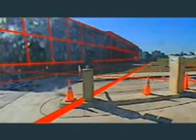It was 37 feet from the top of the tail to the center of the exhaust. From the bottom of the engines to the top of the tail is more than half the height of the Pentagon. Meyssan and many others have tried to figure out where such a large plane could be hiding in this image. The only hiding place is the rectangular post, but the post is not large enough for a 757 to hide behind. Let's zoom in on that upper right corner.

These video images are low quality to begin with, so magnifying them will create grainy images. But despite the graininess, can you see anything that resembles a Boeing 757? We could settle this issue if the military would release all video from all security cameras. So why don't they? Why the secrecy?

Also, notice that the time in the video is incorrect. The military uses IRIG timecode to identify events, so they certainly know precisely when Flight 77 hit the Pentagon. So why provide a false time? The military announced they don't know why the time is incorrect. But is our military really unaware of what is going on at their headquarters? Or are they hiding the time code because it contradicts the official story?

What about the witnesses who saw Flight 77? 'No doubt about it, American Airlines slammed right into the building.' No doubt about it? Who is this guy, and what did he really see? How can anybody be certain about an aircraft flying close by at 400 miles per hour?

How did Flight 77 get to the Pentagon? This is another suspicious aspect of the attack. The plane vanished from air traffic controllers near Ohio, as shown by the question mark. Air traffic controllers immediately called for help. Less than an hour later, an unidentified blip appears on the radar screen near the Pentagon.

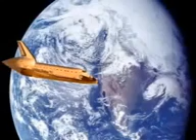The shuttle shattered 40 miles above Texas while traveling perhaps 12,000 miles per hour. Pieces of the shuttle and the astronauts were found over hundreds of square miles. By comparison, the passengers and debris from Flight 77 were confined to a very tiny area.

But where are the pieces? There were only 7 astronauts, but pieces of their bodies were found. There were 64 people on Flight 77, but there is no sign of their bodies or even their blood.

This area is the corridor between rings. There is nothing in this rubble that looks like Flight 77 or pieces of luggage. This hole was supposedly created by Flight 77, but nothing in the rubble would support such a theory. Another photo shows building materials and office furniture, not pieces of airplane. Going inside the offices, the only rubble we find is of that kind.

There are only a few photos that show scraps that appear to be from an airplane. For example, this is supposedly a piece of the skin of Flight 77. However, this metal seems too thin to belong to such a large airplane. These planes are 155 feet long and 60 tons when empty. The engines are 9 feet in diameter, with heavy steel components. The small figure next to the engines is a 6-foot-tall man to show how large these engines are.

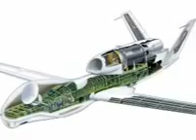Is this a piece of Flight 77? It would be helpful if the military would release high-quality photos of these pieces so that we could see them clearly. So why doesn't the military provide better photos? Perhaps because a high-quality photo of this item would show us that it's so small and delicate that it looks like it belongs to a Global Hawk.

Here is another thin piece of metal that would fit better on a Global Hawk than a 757. Furthermore, a 757 would leave a total of 60 tons of scrap, not just a few pieces that were so thin that people could pick them up without effort.

These tiny scraps of aircraft would make sense if a Global Hawk crashed into the Pentagon, because the Global Hawk was designed to be extremely lightweight. One reason for its low weight is to allow it to remain in the air for a very long time, so it can observe people on the ground for long periods.

It can remain in the air for as long as 35 hours. Another reason for its low weight is to reduce the power requirements of the engine, which in turn reduces the noise and heat from the engine. This makes it difficult for people to hear it, or pick it up with infrared sensors. A Global Hawk is like an eggshell with an engine.

Christopher Bollyn of the American Free Press spoke with Steve Riskus, who saw the plane hit the Pentagon and took these photos of the fire before the firemen arrived. Steve said the plane flew by his windshield, but he did not hear much noise.

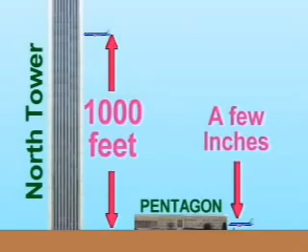This photo resembles those from other disasters. Specifically, most of the people are dressed to deal with fire, or they have gloves and work boots. There are no secretaries in high-heeled shoes, nor are there any children. However, a few photos show executives wandering around among the firemen.

Who are these two guys? Why are they picking up scraps? They do not have gloves on, nor work boots. They are holding the parts away from their body, which is a sign that they are worried about getting their clothes dirty. So why are they walking around in the firefighting foam, water, human body parts, and sharp scraps of airplane? Why are they so concerned about finding scraps of Flight 77 that they will rush out among the firemen to help them pick up a few scraps?

The police are supposed to arrest people who pick up evidence. For example, on February 4th, 2003, 2 people were arrested for picking up space shuttle debris. They faced 10 years in prison and an incredible fine. Why didn't the police arrest these guys?

Are these the FBI investigators? If so, why didn't they let the workers with gloves and boots pick the scraps up? A Boeing 757 would leave 60 tons of scrap, in which case these 2 guys would not be able to contribute anything significant to the cleanup.

But if a Global Hawk crashed into the Pentagon, there would be only 4 tons of scrap. Furthermore, since more than 50% of a Global Hawk is carbon fiber and resin rather than aluminum, if most of the non-metallic material burned, there would be less than 2 tons of scrap. This would explain the mystery of why there are so few scraps.

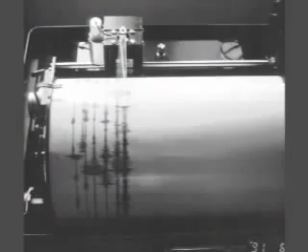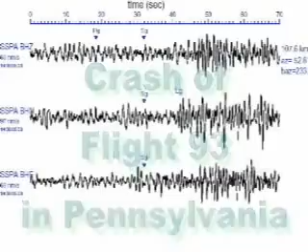However, there is no seismic data for the airplane crashing into the Pentagon. The scientists who analyzed the data reported, "Despite detailed analysis of the data, we could not find a clear seismic signal. A seismic station near the Pentagon does not show any clear sign of an airplane crash. A different station shows a blip that might be an airplane crash at 9:39, and a third station shows nothing."

The blip in the middle graph, which I colored red to make more visible, appears to be a possible airplane crash, but the scientists who analyzed the data claim that it occurred at too high a frequency. The question this leads us to is, would the frequency be too high for the explosion of a missile?

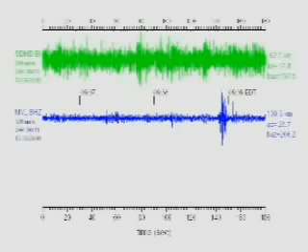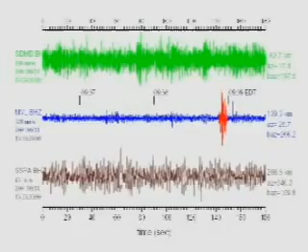6 Global Hawks were built as of December 2002, so if one of them crashed into the Pentagon, there should be one less in the inventory. Christopher Bollyn spoke with the Air Force in December 2002, and they admitted that 2 Global Hawks were lost in ongoing operations. Not surprisingly, the Air Force refused to explain what "in ongoing operations" means.

As previously mentioned, Flight 77 vanished from air traffic controllers near Ohio. Nearly an hour later, it was noticed on radar near Washington, D.C. It was dropping from a high altitude. CBS News describes it as a downward spiral, turning almost a complete circle.

How do we explain the sudden appearance of Flight 77? Perhaps because it was actually one of the missing Global Hawks, not Flight 77. If a Global Hawk flew from Ohio to the Pentagon above 60,000 feet, it would not be easy to see on radar until it descended to below 10,000 feet.

Flight 77 dropped to treetop level and headed towards the Pentagon. But where are the witnesses who heard the tremendous roar of its jet engines? The lack of noise suggests that Flight 77 was actually one of the missing Global Hawks, which are very quiet.

As the Global Hawk crossed into Pentagon property, a missile may have been fired at it. Perhaps the Pentagon has missiles in its security system. The missile would have shattered the Global Hawk and incinerated most of its carbon fiber.

But just in case small pieces survived, people would have to check for scraps. The fuselage has an aluminum frame, so if a large piece of it survived, it would have to be quickly hidden also. While a Global Hawk and a missile can explain what happened at the Pentagon, where are the passengers and crew of Flight 77?

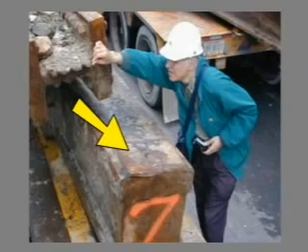At the upper left corner is a standard I-shaped beam. It would be considered massive in most buildings, but it seems delicate next to the biggest beams of Building 7. As is typical in the design of buildings, bridges, and most industrial products, Building 7 was designed with more strength than it actually needed. So how did a building with such massive steel framework disintegrate into such a tiny pile of rubble from a few tiny fires?

A government agency, FEMA, conducted an investigation into why the buildings in the World Trade Center collapsed. However, the editor of Fire Engineering magazine became so disgusted by the investigation that the January 2002 issue carried an angry article in which he accused the investigation of being a half-baked farce.

Later that month, both Bush and Cheney asked Tom Daschle to limit the investigation. Apparently, a half-baked farce was more of an investigation than Bush and Cheney wanted. I suppose they would have preferred a quarter-baked farce.

In March 2002, the Committee on Science of the House of Representatives held a meeting to investigate the investigation. There were more insults and accusations at this meeting. For example, Congressman Boehlert complained that the investigation seems shrouded in excessive secrecy. Professor Corbett complained that they were trying to run an investigation with part-time engineers and scientists and on a shoestring budget. There were also accusations that landlords and insurance companies interfered with the investigation. It seems that a lot of people were helping President Bush ruin the investigation.

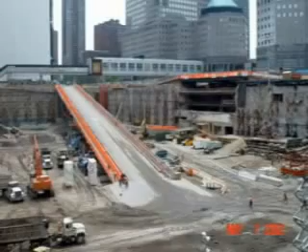Ken Starr spent $40 million investigating the sexual activities of President Clinton. Why didn't Ken Starr advocate giving money to the investigators of the World Trade Center collapse so that they didn't have to depend on part-time scientists and on a shoestring budget?

In May 2002, FEMA released the report on the collapse of the buildings. Not surprisingly, the report doesn't explain anything. For example, rather than explain how the fires caused Building 7 to collapse, the FEMA report has this: 'The specifics of the fires in Building 7 and how they caused the building to collapse remain unknown at this time.' Our government spent 7 months investigating the collapse of the World Trade Center buildings, and at the end they announce they have no idea what happened to Building 7. If FEMA was a private company, I would demand my money back. Since they are a government agency, their worthless report is evidence that they are involved in covering up a scam.

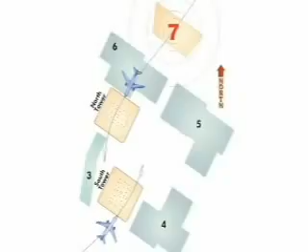The government's explanation for how the towers collapsed is often referred to as the pancake theory. The report created by FEMA has only 2 diagrams to explain this theory. The first diagram shows a fire, and the next diagram shows a floor falling down onto the floor below it. Supposedly, the falling floor breaks the joints holding the floor beneath it, and then both of those floors fall to the floor below that, which breaks that floor, and so on, eventually creating a stack of floors at the base of the building.

One problem with this theory is that photographs of the South Tower show the top section broke off and fell to the ground, landing on top of building number 4. The pancake theory definitely does not explain the South Tower. However, just as FEMA did not bother to explain what happened to Building 7, FEMA did not bother to explain what happened to the South Tower.

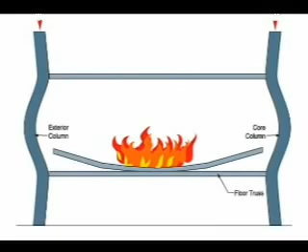The towers did not simply fall down or break into pieces. Rather, as jets of dust flew out the windows at extreme velocity, that portion of the building disintegrated.

Dust was thrown hundreds of feet. When it was over, it was difficult to find anything resembling office furniture, chunks of concrete, human bodies, or large pieces of the steel frame.

The towers had steel frames. They were not steel-reinforced concrete structures. The concrete was used only as a flooring material. Somehow, virtually all of the beams broke apart into short sections.

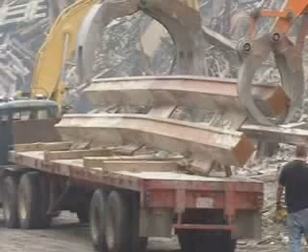A closer view of the rubble makes it look as if the towers were put through a giant shredding machine. What happened to all of the office furniture? Where are the elevators? What about the staircases? The concrete, office furniture, and people disintegrated into such tiny pieces that firemen were scooping them up with buckets.

How can buildings made of massive steel beams and thick steel plates shred themselves into pieces? This is as ridiculous as an automobile crashing into a wall and then shredding itself into pieces. Buildings and cars are made of low-carbon steel, and this type of steel simply does not behave in this manner. This type of steel bends, it does not shatter into pieces. There should be large, twisted pieces of steel assemblies in this rubble.

Perhaps you wonder if the beams in the World Trade Center were thin and delicate, and that the fire destroyed the towers because the architects did not make the beams strong enough. However, architects always give a building more strength than it needs in order to provide a margin of safety. The towers withstood storms for decades, and there was never any sign that reinforcements were needed.

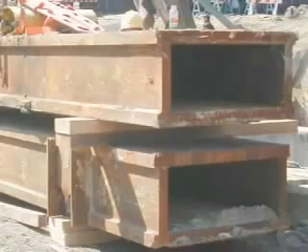This photo shows both a rectangular core column and some square exterior columns. There were 236 of these square columns running up the exterior of each tower.

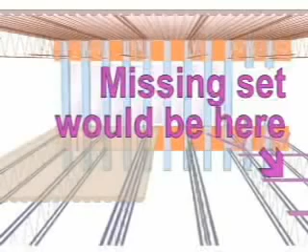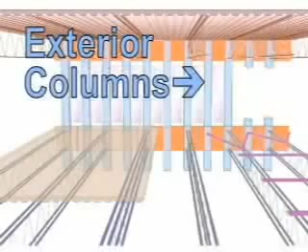The exterior columns were further strengthened with steel plates. The plates were welded to the columns and then bolted to one another, forming straps around the tower. Since the floors were spaced 12 feet apart, the set of trusses was repeated every 12 feet, and the steel straps that wrapped around the tower were also repeated every 12 feet. As you can imagine, that put a lot of steel in this building.

The empty space in the trusses was used for ceiling tiles, electric lights, air conditioning ducts, and other utilities. It is important to realize that the framework of these towers was 100% steel. By comparison, the building in Oklahoma City that Tim McVeigh was accused of destroying had a concrete framework with steel reinforcing rods in the concrete.

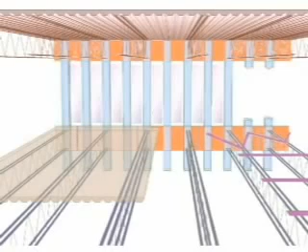This is a highly simplified cross-section of the tower. It shows one floor of the tower, looking down onto the concrete floor. There were 47 rectangular columns in the center of the tower, although only 4 are shown in this simple diagram. There were 236 exterior columns, although only 16 are shown.

These exterior columns were literally on the outside of the building. Many people assume that these towers disintegrated because they were weak, but there is no evidence for such an accusation. Rather, the photos and descriptions from people inside the towers prove that these towers were so incredibly strong that when the airplanes crashed into them, each tower merely swayed a bit in the opposite direction and then swayed back to their normal position.

Both towers then remained motionless. People inside the towers felt them tilt, but the movement was so small that neither photos nor video show the tilting. Winter storms caused the towers to shake more than those airplane crashes. How could the towers absorb 80-ton airplanes crashing into them at 400 miles per hour without wobbling enough for us to observe it? Obviously, these towers were incredibly strong.

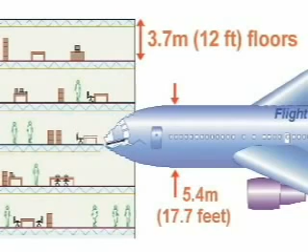According to engineering sites that have technical data for these towers, the wind force that these towers had to withstand was greater than the force of those airplanes. In other words, a strong wind put more stress on the towers than those airplanes. So what caused these strong buildings to shatter into pieces?

The official explanation is that a fire did it. Since no fire has ever destroyed a steel structure before, how could fire destroy buildings strong enough to handle the crash of an 80-ton airplane? The only difference between the fires in the towers and conventional office fires is that thousands of gallons of jet fuel had splattered inside the towers. Is jet fuel capable of creating some type of monster fire that destroys steel buildings?

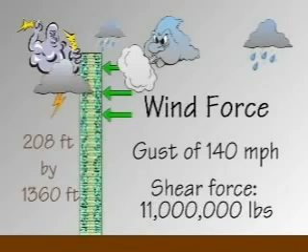The Boeing 767 that hit this tower was a large airplane with about 80 tons of metal, people, and luggage. The plane slammed into the tower at perhaps 400 miles per hour. Pieces of the aircraft, flooring, and office furnishings would have flown through 2 or 3 floors. Anybody in the path of this flying debris would have been killed. The thousands of gallons of jet fuel that sprayed into this area and then caught on fire would certainly kill a lot of people also.

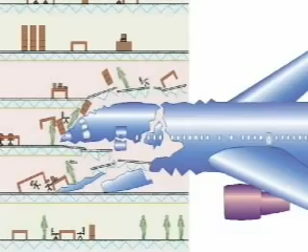The only way anybody could survive this airplane crash was if the flying debris and the fires did not reach them. Since at least one man and woman survived, and since they were on different floors, they proved that the fires and airplane debris did not extend throughout the entire area of the crash zone. Furthermore, these people walked to the hole from wherever they were at the time of the crash. How could this woman walk through burning jet fuel? How could she survive fires that were so intense that they were capable of destroying a steel structure?

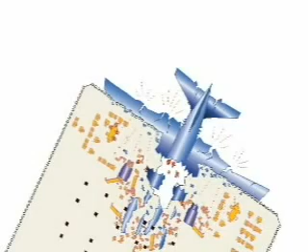As I explain in more detail in the book, there is no evidence that the fires in these towers were extreme. In fact, the fire in the Meridian Plaza office building in Philadelphia in 1991 was much worse, and that building did not even break into 2 pieces.

The fire in the South Tower was so small that it did not even spread from one side of the floor to the other. The people who jumped out the windows created the illusion that the fire was so intense that they would rather jump than be burned by the fire.

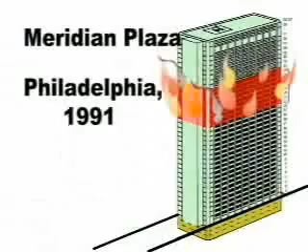Even if the fires were intense, fire does not shatter steel structures. Look at the steel grate in a fireplace. The grate is in contact with hot coals for hours, and sometimes natural gas flames burn underneath at the same time. However, the grates never shatter into pieces.

Rather, the heat merely causes the iron to oxidize faster than normal. After many years, the grate develops a multicolored crust of oxide, with particles of ash and soot in the crevices. Pieces of the grate eventually fall off, but only because of the thinning of the metal due to oxidation. No fire has ever caused a fireplace grate, steel building, steel automobile, or any other steel structure to disintegrate.

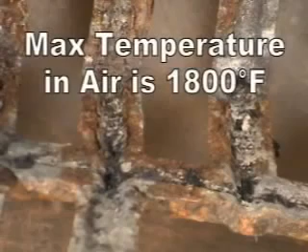The maximum temperature hydrocarbons can reach in the atmosphere is about 1800 degrees Fahrenheit. However, that maximum temperature can be reached only when the hydrocarbons and the air are mixed in perfect proportions. These perfect proportions are reached only in a few controlled situations, such as a kitchen stove. This produces flames that are clean and a beautiful blue, rather than yellow and leaving trails of soot. Even though stoves reach the maximum possible temperature, they never shatter into pieces. So how could even lower temperatures cause the towers to disintegrate?

Controlled Demolition is a company that demolishes old buildings. They demolished the building in Oklahoma City that Tim McVeigh was accused of blowing up. They were also hired to clean up the mess at the World Trade Center. They developed a special explosive and technique of using it for demolishing steel structures. They are so proud of this technology that they trademarked its abbreviation,

DREXS. Their British division describes the technology as, 'Our DREXS systems segment steel components into pieces matching the lifting capacity of the available equipment.' In other words, if your trucks can hold pieces of steel up to 24 feet in length, then this company will cause all steel assemblies to break into sections 24 feet or less.

If a fire can do exactly what controlled demolition does with their special trademarked explosives, then I'd like to start a new business called Fire Demolition Incorporated. This company will demolish buildings by setting a few small fires on a few floors. These fires will demolish the building just as thoroughly, but at a much lower cost. I need money to get this business established. Are any of you interested in investing?

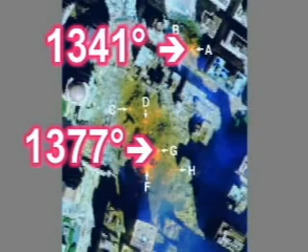These incredible temperatures are more evidence that explosives were used. The explosives in the basements had to be powerful to break apart the massive steel beams. Explosives create very high temperatures, and the heat had nowhere to go since it was deep underground.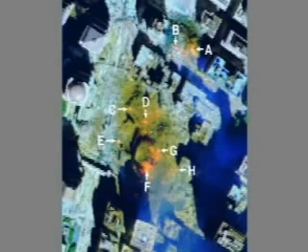According to the scientists who analyzed the seismic data, the North Tower collapsed in about 8 seconds. The collapse started at about the 94th floor, near this woman. This means that 94 floors shattered at an average rate of about 10 floors per second.

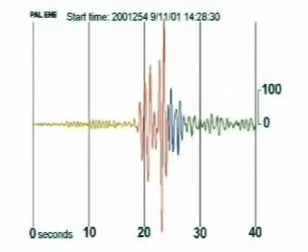If this woman had tossed a steel beam off the edge, it would have hit the ground about 8 seconds later. The formula to figure this out is very simple, if we ignore air resistance. 94 floors at 12 feet per floor is 1,128 feet. Divide that by 16 and take the square root, and we get 8.4 seconds.

This means that the North Tower collapsed as fast as objects fall when there is no air resistance. As I explained in my book, explosives were shattering the towers slightly faster than the rubble was falling.

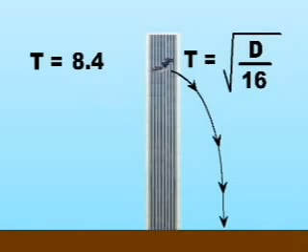The towers were built by the government, so taxpayers owned both of them. However, somehow the government was convinced to lease the towers for 99 years. Larry Silverstein became landlord on July 24th, less than 2 months before the attack. He then had control of the maintenance and security departments, and he began to replace security personnel.

Silverstein brought Frank Lowy into the deal to become landlord of the underground shopping mall. Lowy is a billionaire who owns shopping malls in several nations. After the towers disintegrated, Silverstein demanded insurance companies pay him twice what the policy stated on the grounds that each tower was a separate attack. What a coincidence that after these guys got control of the World Trade Center, Osama decided to destroy the entire complex.

Or is this Israeli journalist correct that a few Israelis were involved in the attack? He believes that the wedding hall that collapsed mysteriously in Jerusalem was their test of demolishing a building while people were in it. And is he correct that the mysterious crash of Egypt's Flight 990 was a test of getting control of an airplane? A newspaper in New Hampshire mentioned the amazing coincidence that the air traffic controller watching over Flight 990 also watched over the 2 planes that hit the towers.

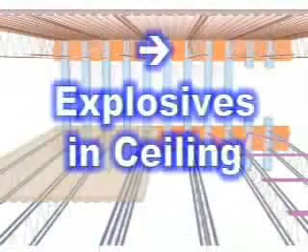A researcher of the Kennedy assassination points out that most people believe in coincidence theories because they explain everything as being due to coincidence. For example, most people believe it was coincidence that all 4 airplanes were 50 to 80% empty. That Todd Beamer decided to spend his last 13 minutes of life talking on a lousy quality airplane phone to a stranger rather than his pregnant wife. That fire pulverized 3 steel buildings even though fire never did such a thing before or after. That terrorists hit the empty section of the Pentagon.

How do coincidence theories make more sense than conspiracy theories?

Some people consider my book to adequately explain that the September 11th attack was a scam. However, some people who know me personally responded by giving me clippings of newspaper and magazine articles to show me that Flight 77 really did hit the Pentagon, and that Osama did not have any assistance from the U.S. government. I have also been told that the Discovery Channel thoroughly explains that fire caused the towers to collapse.

Most people are certain that the true source of knowledge comes from large corporations, not individuals such as myself. Therefore, I would like to show evidence that some news reports are attempts to manipulate us, not educate us.

For example, James Robbins claims to have seen Flight 77 crash into the Pentagon. When Robbins heard of Meyssan's accusation that Flight 77 never hit the Pentagon, Robbins wrote an insulting article for the National Review in which he claims Lenin, Hitler, and Pol Pot were just like Meyssan.

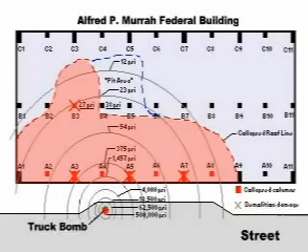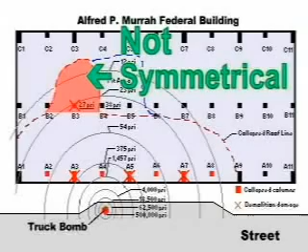The only sensible explanation is that explosives had been placed on the column that supported this section of the building, and when those explosives were detonated, the column was shattered and this section collapsed. Partin's conclusion is that demolition explosives were placed in the building, and McVeigh's truck bomb was merely to fool people into believing that McVeigh was responsible. Unless somebody can show that General Partin's calculations are wrong, the Oklahoma City bombing was a scam.

Unfortunately, many people dismiss Partin on the grounds that if he was correct, the government wouldn't allow him to expose the scam. Now consider that unless somebody can show that Meyssan, I, and others are wrong, the September 11th attack was a sequel to the Oklahoma City bombing.

The attacks were identical. For example, in Oklahoma, Tim McVeigh was the foolish patsy, a truck bomb grabbed the attention of the public, and demolition explosives that had been placed in the building before the attack were detonated while people were inside. On September 11th, Mohammed Atta was the foolish patsy, airplane crashes grabbed the attention of the public, and demolition explosives that had been placed in the buildings before the attack were detonated while people were inside.

Furthermore, some of the same people and companies were used for the investigation and cleanup of both attacks, such as Gene Corley and Controlled Demolition Incorporated.

Whoever did the Oklahoma City bombing scam got away with it. This undoubtedly gave them confidence to expand to something bigger. And since they got away with the September 11th attack, they may be planning something even more spectacular.

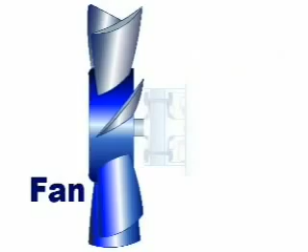A turbofan is similar to an electric fan, except that the fan is driven by a gas turbine engine instead of an electric motor. A small amount of air from the fan is used by the turbine, but most of it flows around the turbine. Fuel is sprayed in a combustion chamber, and the hot, high-pressure gas rotates the turbine as it shoots out the rear. This is the rear of a turbofan.

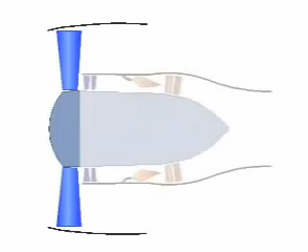The cool air flows around the engine. The turbine exhaust flows from the smaller, tapered section. Most of the exhaust is pure, cool air. Only a small amount of air passes through the combustion chamber, so only the center of the exhaust could have a different visual appearance from the outside air. The most likely color of the exhaust is a light brown, due to soot and pollutants.

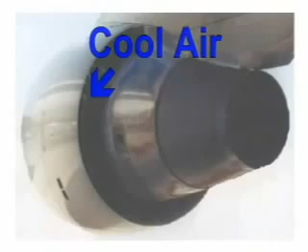Even if you look directly into the rear of the engines, you cannot see any white exhaust. During takeoff, the engines are burning a lot of fuel, but even then, the exhaust of a properly maintained turbofan is difficult to see.

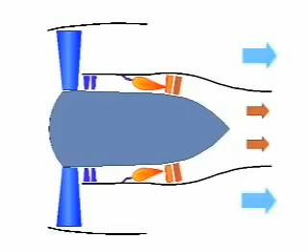Rocket exhaust is so hot it glows white as it leaves the engine. It cools into white clouds, sometimes with a brownish tint. What are these white clouds made of? And why do rockets produce these white clouds, but not airplanes?

The exhaust is white because a third of it is steam. This extreme concentration of steam rapidly condenses into tiny droplets of hot water, which appear to our eyes as white clouds. You can see this effect with a tea kettle. The white plume that comes from a tea kettle is steam.

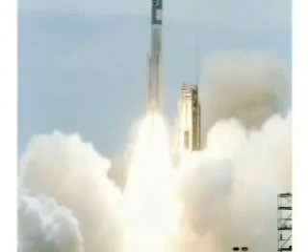Forest fires also produce extremely visible smoke. This is partly due to steam, but these fires also create a lot of ash and partially burned hydrocarbons. The ash consists of small particles of non-flammable materials. Volcanoes also produce extremely visible smoke, mainly because of steam and ash. However, in this case, the ash is powdered rock.

Why do missiles produce so much steam? Because they carry their own oxygen rather than use the air. The air is mostly nitrogen, and the nitrogen dilutes the steam. By not having atmospheric nitrogen, the exhaust has a much higher concentration of steam.

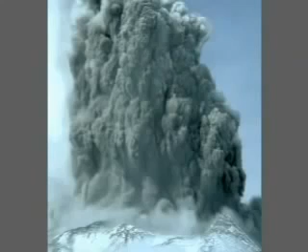A turbofan produces steam, just like missiles. So why doesn't the exhaust from a turbofan appear white? Because the nitrogen from the air dilutes the steam so much that droplets don't form.

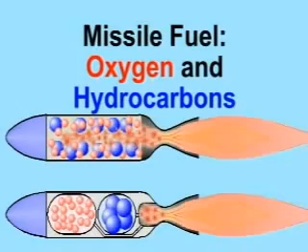Actually, under certain conditions, the exhaust of a turbofan is white. At high elevations, the air is below freezing, and it's often saturated with water vapor. Any additional water vapor will form ice crystals. This causes the engines to leave trails of ice crystals.

Since these trails form only under special conditions, a plane flying at a slightly different elevation or location may not leave a trail. However, turbofans don't leave trails on warm days, such as that morning of September 11th. Only missiles have enough steam in their exhaust to leave a trail of water droplets at ground level and in hot weather. So, how could this trail be from Flight 77?

The white trail in the Pentagon security video is certainly the exhaust of a missile, not a passenger airplane. Only conspiracy nuts and people who do not know much about turbofans would insist that Flight 77 created that white trail.

The only sensible issue to debate is who fired the missile. The CIA? The U.S. military? And was the missile fired from a drone, such as a Global Hawk? Or was it fired from a truck on the Pentagon property? Or was it a shoulder-mounted missile?

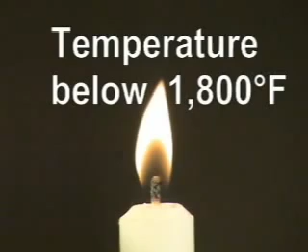When an airplane crashes, some of the fuel splatters into the air and quickly vaporizes, creating an explosive mixture of fuel and air. When this mixture ignites, the flame rapidly travels through it, creating a blast that resembles a low-power explosive. However, the oxygen in this mixture is quickly consumed, so this initial blast is very brief.

Once the oxygen is gone, the fireball resembles a candle flame because the fuel is burning only along the outside. As with candle flames, the fireball changes its shape and rises upward, but it does not expand. The size of the fireball is determined by the distance the fuel splattered and the initial blast.

The fireball at the South Tower was enormous because a lot of fuel splattered into a large area. However, once it formed, it did not expand by much. Rather, it rose upward while being pushed southeast by the breeze. Also, it was orange and full of soot.

Candle flames are normally clean by comparison because they are small and indoors, so nothing interferes with the mixing of oxygen and fuel. However, large candle flames can produce enough heat to create their own turbulence, thereby causing soot.

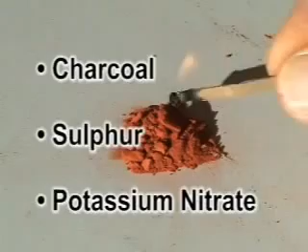This mixture is still used in fuses and fireworks, but the military has switched to a more destructive explosive in which oxygen is attached directly to the hydrocarbon molecule. Nitroglycerin and TNT are examples.

A slightly more powerful explosive that is widely used today is RDX. 3 carbon atoms are held together by 3 nitrogen atoms. 2 hydrogen atoms are attached to each carbon. Attached to that molecule are 3 more nitrogens, each of which has 2 oxygens.

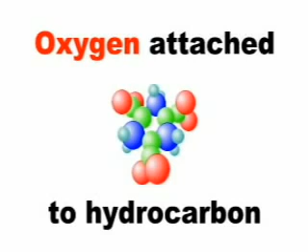Nitrogen does not hold carbon or oxygen very tightly. Rather, the nitrogen is analogous to rubber bands that are on the verge of breaking. When RDX ignites, the nitrogen loses its grip on the carbon and oxygen, and the molecule shatters.

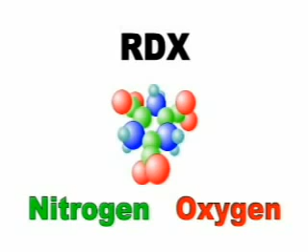The oxygen, carbon, and hydrogen then combine, producing heat and high-pressure gas in the process. The molecule next to it then shatters, starting a chain reaction that travels through the material at about 18,000 miles per hour. RDX detonates so quickly that it explodes even without being confined to a container.

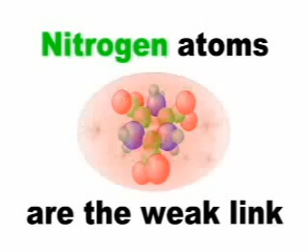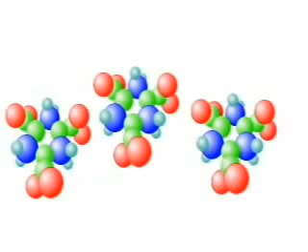The military takes advantage of this by mixing powdered RDX with about 10% of a rubbery material to create a plastic explosive known as C4. The rubber allows RDX to be molded easily, and it makes it safer to handle because RDX is poisonous. However, the rubber reduces the explosive power.

The hydrocarbons must get oxygen from the air, and that process takes time. But adding oxygen to the hydrocarbons allows the material to burn at a rapid rate. It is this addition of oxygen to the hydrocarbons that transforms hydrocarbons into an explosive.

The most important characteristic of explosives is that they create an incredibly high-pressure gas. Calculations show the pressures are as high as millions of pounds per square inch. This pressure causes the gas to expand outward at supersonic speed. The gas is mainly steam, carbon monoxide, nitrogen, and carbon dioxide.

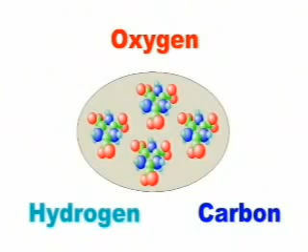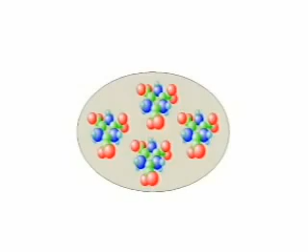Temperatures exceed 3,000 degrees Fahrenheit, which is above the melting point of steel. This extreme pressure and expansion is what makes explosives so dangerous. A small candle has more energy than a grenade, but a grenade is very destructive. The reason is that the energy in a grenade is released within a fraction of a second, rather than several hours, thereby creating such phenomenal pressures that the steel housing is shattered and pieces are sent flying.

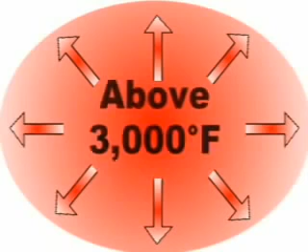To summarize two important differences between explosives and fireballs: first, explosives reach temperatures beyond 3,000 degrees Fahrenheit, but it's impossible for hydrocarbons burning in the atmosphere to exceed about 1,800 degrees. Second, and most important, explosives create extreme pressures that cause the gas to expand at a supersonic rate. Nothing can withstand a supersonic blast of 3,000 degree gas at 5 million pounds per square inch. This allows explosives to tear apart steel beams, pulverize concrete, and shatter solid rock.

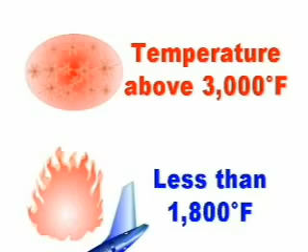Fireballs, on the other hand, have no significant pressure. Another way to understand the difference between explosives and fireballs is to consider that if a fireball would remain on the ground, rather than rise in the air, you could get your clothes wet, hold your breath, and run into it. As soon as you passed through the boundary of flames, you would find yourself in a chamber of hydrocarbon vapor. There are no flames inside a fireball, so the temperature is low. More importantly, there is no high pressure inside.

Of course, you would be roasted by the infrared radiation coming from the outside flames. However, my point is that you could run into a fireball, but you could not run into an explosive. If you think I'm exaggerating about running into a fireball, just watch as I pass my fingers through flames that are hot enough to melt aluminum.

Now that you know about explosives, you can understand one possible reason the military is hiding this video. If a missile exploded, the fireball would have started out as a bright white light, and within one frame of video it would have grown to the size of the Pentagon. This rapid expansion would prove that it was an explosive.

If this video truly shows Flight 77, our military officials should be fired for keeping it a secret, because they're allowing accusations of corruption to run wild throughout the world. Our military is supposed to protect us, but the evidence and secrecy suggests that they have joined some mysterious crime syndicate.